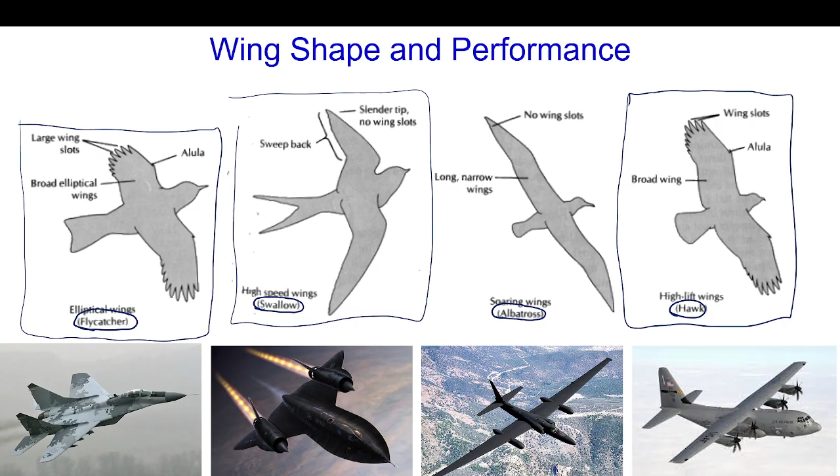So the original purpose of the C-130 was to deliver heavy artillery essentially across the ocean to what was the Korean War battlefield. And while it needed to do multiple jumps for refueling, it was nonetheless designed and specified to carry very, very heavy loads up to 75, even 100,000 pounds of munitions, such as that tank shown there.

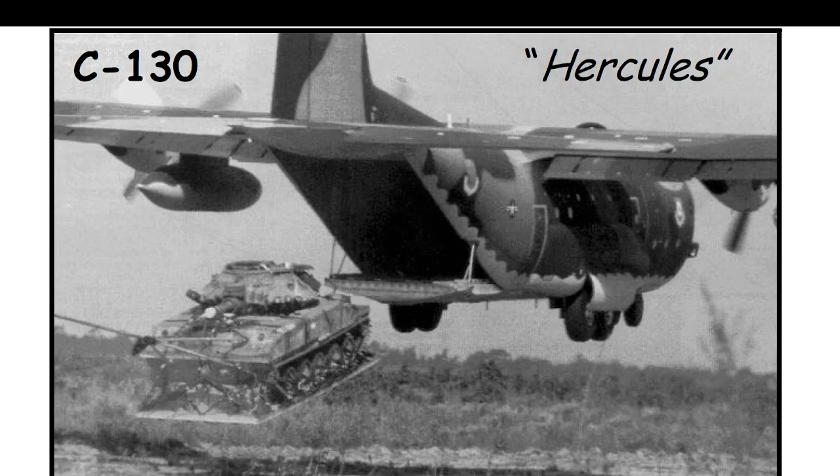So the assignment for students in my ME 4730 class are parts 2 and 3 of what I've listed here. Today we're going to go through part 1, which was a final lesson in my ME 3300 fluid mechanics class, and this is serving as a review and a lead-in to ME 4730 thermal fluid systems design.

So today we're going to size the engines to allow a C-130 to carry 75,000 pound force of load over 1,500 miles at a velocity, a constant cruising speed of 350 miles an hour.

And the next parts, part 2 and part 3, are to size the engines required for the aircraft to actually take off at an even heavier load with a relatively short runway of 3,750 feet. And then with the information on the power of the engines required to perform that takeoff, we're going to actually design the engines while we're studying the Brayton cycle in thermal fluid systems design.

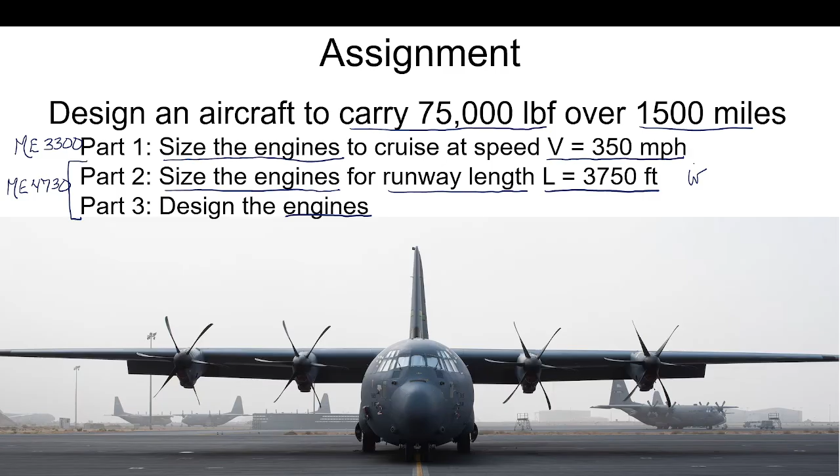So let's start off with a little review. All the information on the C-130 used here is all publicly available.

This data is a screenshot of information at the military website, giving the overall dimensions: a wingspan of almost 133 feet, a length of almost 100 feet, a height of almost 40 feet, and then what we have here is the wing area or planform area, which we'll be using to calculate wing lift and wing drag.

Then we have other information such as the empty weight of 75,800 pounds. This is just the airframe without any additional load. And then we can add in a useful load of around 72,000 pounds.

Now, it can actually go up to nearly 100,000 pounds under wartime conditions, but for present purposes we're going to focus just on a 150,000 pound aircraft for the majority of the calculations done here.

Now we have further information on the power plant. It's got 4 Allison T56 turboprop engines. These have actually been replaced by Rolls-Royce — Allison was bought out by Rolls-Royce, so they've rebranded the engines. Still a T56, but you can see the 4 engines listed in this frontal view right here.

We actually already have the information or the answer to the calculations we'll be conducting today, but we need to see the intermediate steps and why it is we end up with these values. The propeller diameter, you can see here as well, is 13.5 feet diameter. Very large propellers, a rather imposing aircraft, and we want to understand its performance characteristics.

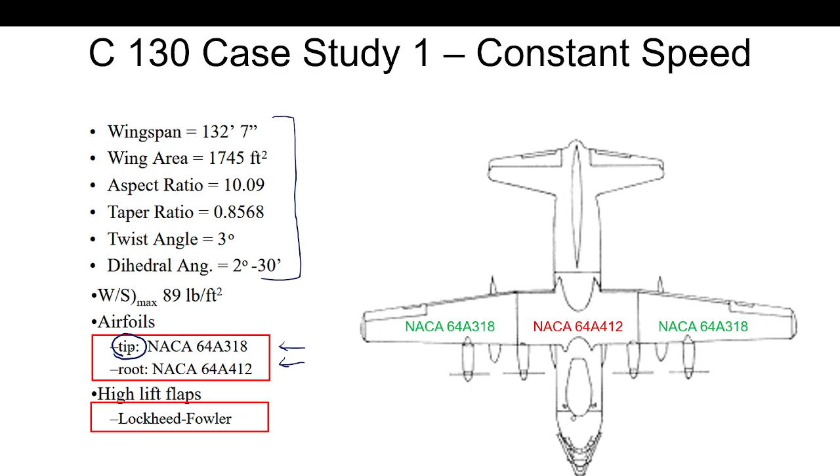Further excerpts from online information show not only the dimensions we've looked at already, but also what type of airfoils are being used. These are 2 types of NACA airfoils. One type is used on the tips — that's this area right here, what we'll refer to as the wing tips. This is a blended NACA airfoil going from a large chord length to a relatively short length. Then at the root, where the wing attaches to the fuselage, we've got this NACA airfoil with a constant chord length.

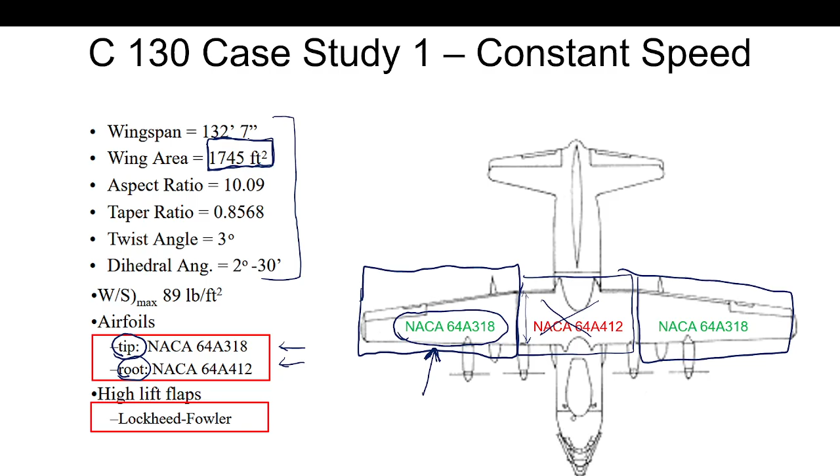Chord length is this dimension right here, attaching it to the fuselage. Now, because the majority of the aircraft is comprised of this NACA 64A318 airfoil, we're going to just assume that it gives the lift and drag characteristics of the entire wing, and we'll disregard the rest for present purposes while maintaining the same planform area, A sub P, for the entire aircraft. Now we can look up the NACA airfoil lift and drag coefficients from this handy website, Bigfoil, right here.

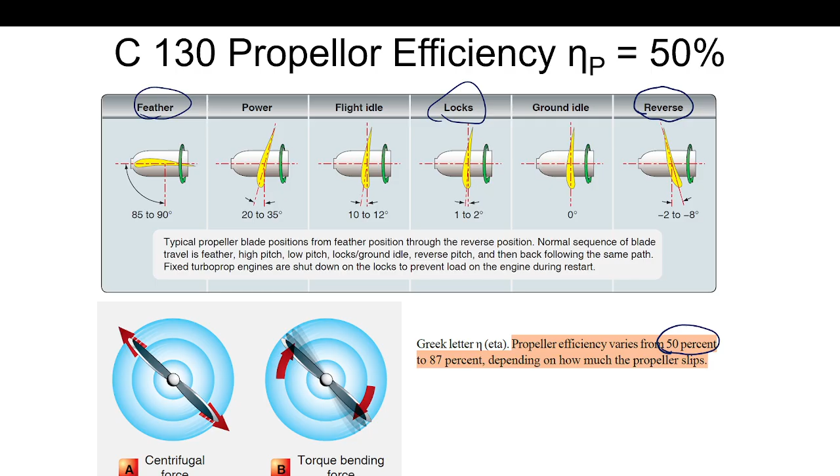Now, another thing we want to consider is there's a multitude of efficiencies and tables of data that we need to make use of. These aircraft have variable pitch propeller blades, which can go everything from fully feathered to locked, a shift of angle of upwards of 90 degrees. They can even go past 0 degrees and provide some reverse thrust if it needs to back up on the runway. Now, these variable pitch blades end up having variable efficiency in their ability to convert shaft power to fluid power, and we're going to take the conservative estimate of 50% for all instances, just to ensure our engine is over-designed for the performance requirements.

So this is the case study that I give to my fluid mechanics students, junior level mechanical engineers, as we work on the aerodynamic chapters of the fluid mechanics textbook. So here we'll be reviewing this.

We're given a fully loaded C-130, uses NACA 64 A318 airfoils, and flies in calm air. That is to say, the wind velocity in the region is 0 miles per hour or feet per second, and it flies at a constant altitude for 1,500 miles. We chose the altitude of 20,000 feet, and the aircraft has the following dimensions and performance requirements. We also want to make an assumption that the momentum flux correction factor is 1 in this case.

We'll be looking at a variant of Newton's second law, referred to as the conservation of linear momentum equation, which is used to calculate the thrust of this aircraft. Typically for turbulent flow, it can be something of the order of 1.05, but for our purposes we're just going to set it at 1.

Now, we already saw that the empty weight of the aircraft is 75,800 pounds. A nominal loaded airplane is around 150,000 pounds, which can actually go up to 175,000 in wartime conditions. We saw a blade diameter of 13 feet 6 inches, 13 and a half feet.

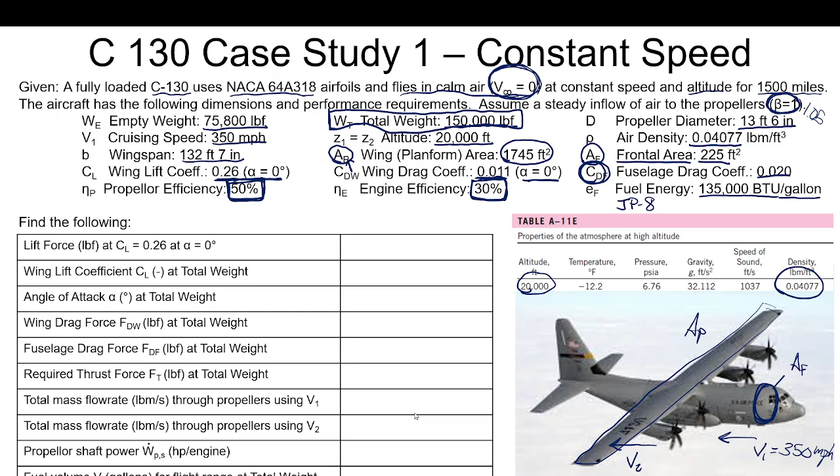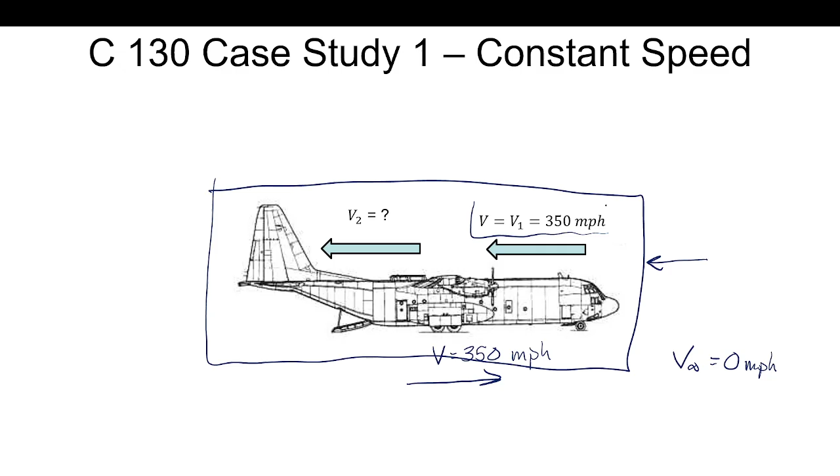So let's start off with just the airspeed of the aircraft itself. We know that it's flying at 350 miles an hour to the right, and the ambient air is 0 miles an hour, that is to say, it's a calm day with no wind. So what happens in this case is that the aircraft induces a wind velocity on itself. Despite the solid object moving 350 miles per hour to the right, if we put our control volume around the aircraft, we can say air is entering the control volume to the left, from the right to the left, at 350 miles per hour. So this is our aircraft speed.

And then we're still looking, we have to do some calculations to find our velocity of the air exiting the propellers right here, the V2, but we'll get to those equations soon enough.

Let's take a look at the forces acting on the aircraft. On one hand, we have the force of lift holding it in the air. It's the product of the lift coefficient times the dynamic pressure, 1/2 rho v squared, times the planform area, the area of the wings as viewed from above.

That counteracts the weight of the aircraft. If the aircraft is not accelerating upward or downward, its acceleration is 0, and the force of lift is equal to the weight, either of the empty aircraft or the total weight of the loaded aircraft. So this would be the summation of forces in the y direction.

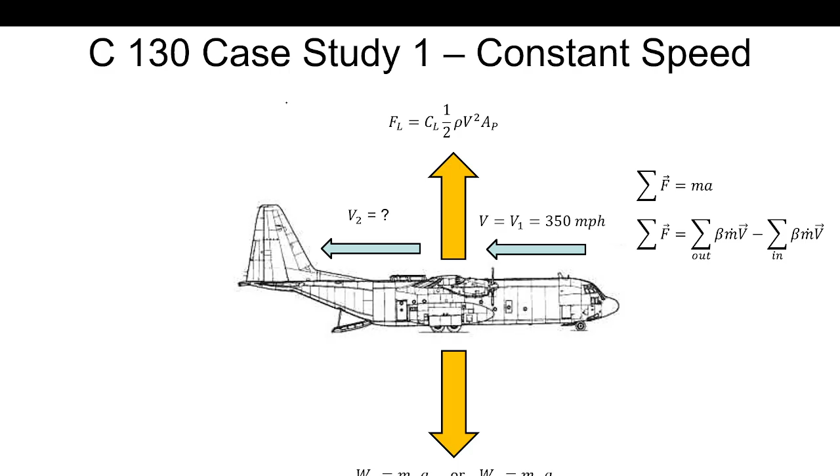We also want to look at the summation of forces in the x direction. To do that, we take a variant of Newton's second law, referred to as the conservation of linear momentum equation for steady state operation, and simplify it to give us the force of thrust as the product of mass flow rate through all four propellers times the change in velocity from the downstream velocity, V2, to the upstream velocity, V1.

In order to maintain constant velocity with no acceleration forward or backward, we'll say A is equal to 0. Then we know the force of thrust has to counteract the force of drag acting on the wing—the product of drag coefficient of the wing, dynamic pressure, and planform area of the wing—as well as the drag force acting on the fuselage, the product of drag coefficient of the fuselage, dynamic pressure, and frontal area of the fuselage.

So let's jump into it. We'll start with the summation of forces in the y direction, which is equal to 0. All we have to do is say the force of lift counteracts the force of weight. So we rewrite this as summation of forces equals force of lift acting upward minus the weight, starting with the empty aircraft, equal to 0. Therefore, force of lift is equal to weight of the empty aircraft for the first step of this problem.

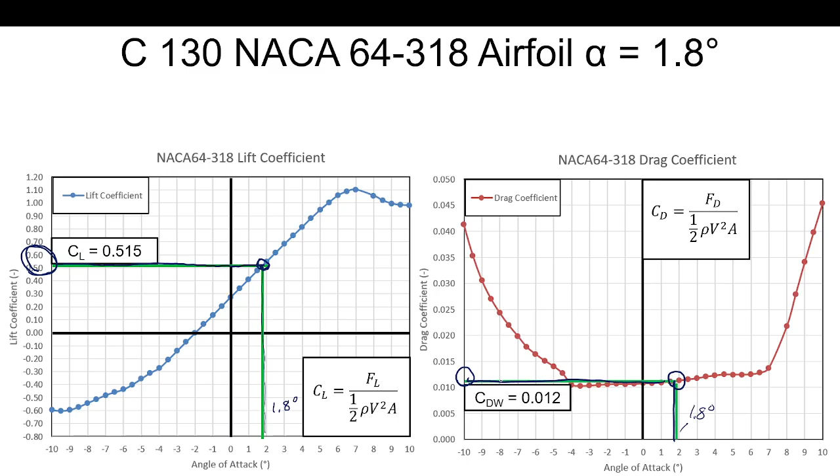So we just worked through the first three calculations. We found that for the unloaded aircraft at 75,800 pounds, that is at an angle of attack of 0 degrees for the wing, using the lift and drag coefficient shown there, we calculate that it would produce 75,678 pound force of upward lift force on the aircraft, thus holding it in the air.

We could say the difference between 800 and 678 is negligible, about 1% variation between the two values. So we can confirm our answer. This was intended as an illustration to allow you to check the results.

Now, our second set of calculations was actually done using the total weight of the aircraft. We found that the airfoils themselves have to be pitched up. Rather than an angle of attack of 0, they have to be pitched up to an angle of attack of 1.8 degrees, obviously exaggerated in that illustration. But nonetheless, this tells us what tilt the aircraft has to be adjusted to in order to ensure level flight.

Now let's proceed on to the wing drag force at total weight. This calculation makes use of the drag coefficient, the wing drag coefficient that we saw previously, the one we extracted from the table, taken from the 1.8 degree angle of attack.

Likewise, we need the wing drag force, the fuselage drag force - that actually doesn't change. And we saw, of course, the wing lift coefficient at that angle of attack as well. But we will be making use of the fuselage drag coefficient, which was 0.020, and then this drag coefficient is the 0.012 that we have for the fully loaded aircraft.

Present calculations in this presentation are going to be based on the fully loaded aircraft now. This, again, was our 513.3 feet per second. And now we're going to figure out the force of drag on the wing, force of drag on the fuselage, and then the thrust force required to maintain steady velocity - that is, acceleration equal to 0 feet per second squared on this aircraft.

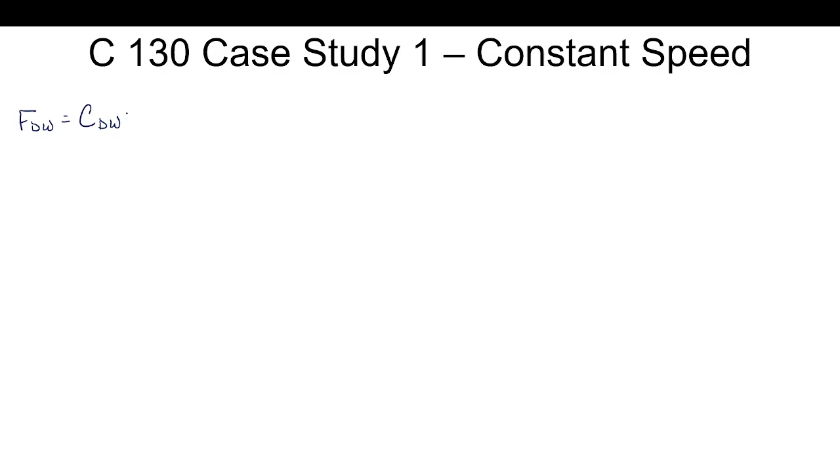So let's start off with just our force of drag on the wing. Force of drag on the wing is equal to our drag coefficient of the wing, which we read from the tables, times our 1/2 density velocity squared planform area.

0.012 times 1/2 times 0.04077 pound mass per cubic foot times 513.3 feet per second quantity squared times planform area of 1745.

Feet squared. So this gives us a force of drag acting on the wing of 112,468, and we roll our units through. We've got pound mass feet per second squared, which we again have to convert to pound force.

This is a step that trips up many people: the calculation of force from mass times the acceleration. In this case, the units we get are pound mass feet per second squared. So this then gives us a drag force on the wing of 3,493 pound force.

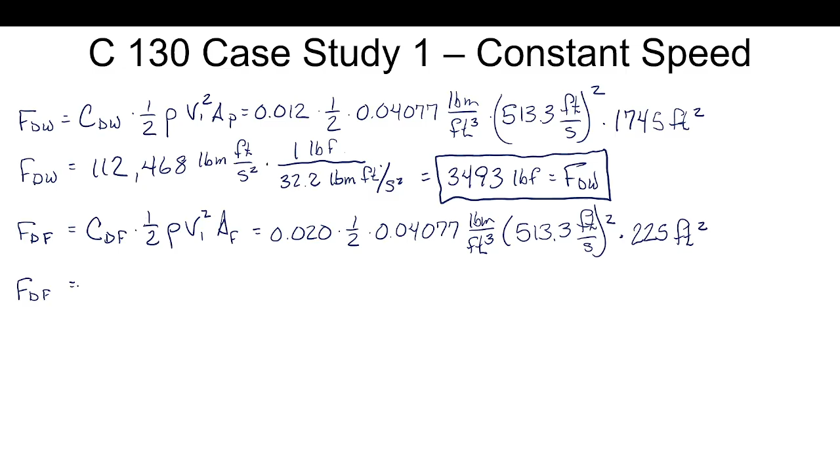Both of these forces, force of drag on the wing and force of drag on the fuselage, are horizontal forces. Our force of drag on the fuselage is then 24,169.4 pound mass feet per second squared.

And again, we have to do our unity conversion ratio of 1 pound force for every 32.2 pound mass feet per second squared, converting our mass acceleration into units of force in the U.S. customary system. This gives us 750.6 pound force as the force of drag on the fuselage. Put a box around it, it's another answer that we were looking for.

With these then, we can take our summation of forces in the x direction is equal to mass times acceleration, so that's Newton's second law there. We know if the aircraft is holding a steady velocity, then its acceleration is 0, and so we can say our force of thrust in the horizontal direction minus our force of drag on the wing minus our force of drag on the fuselage is equal to 0. Therefore, force of thrust is equal to force of drag on the wing plus force of drag on the fuselage.

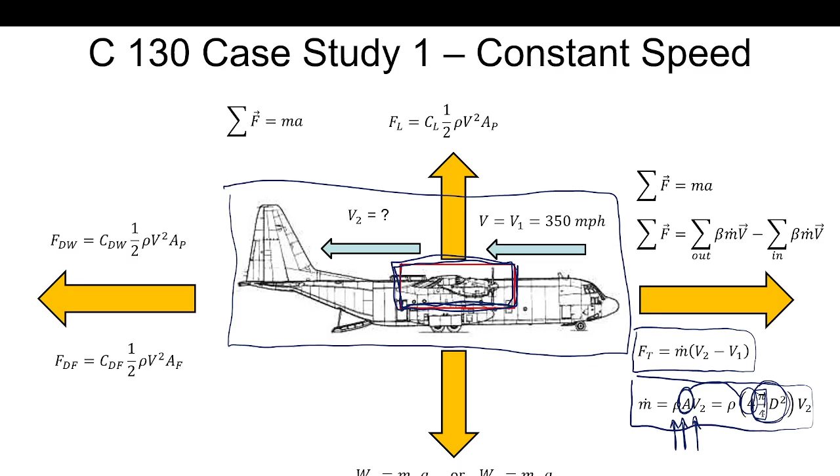Previously, our control volume was the entire aircraft, and now we're zooming our control volume into the engines themselves, taking them into account all at once, using the force of thrust equation and the mass flow rate equal to density of the air, total area of the propellers, times velocity of the airstream. This total area for 4 propellers is 4 times the standard area of a circle in terms of diameter, pi-fourths times diameter squared.

So first we need to calculate mass flow rate of the air using V1 with the information we already have: the density of air, the area of the propeller blades, and the velocity of the incoming air. But this method is incorrect. We're going to take the second, longer approach after we work through that and find out what V2 is, then calculate mass flow rate using V2. But let's start with the easy approach.

Mass flow rate, we'll call it m dot sub 1, is equal to density times area times V1. We use our density of air of 0.04077 pound mass per foot cubed, times our area. We've got 4 propellers, and the area of each propeller is pi-fourths times diameter, so 13.5 feet, this quantity squared, times our velocity of 513.3 feet per second. The product gives us 11,982 pound mass per second, equal to m dot 1.

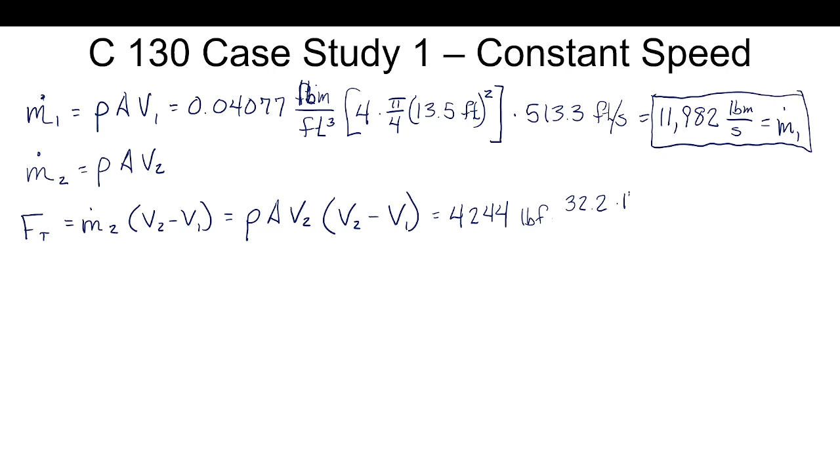Knowing that our force of thrust is equal to mass flow rate, m dot 2, times this difference in velocity from downstream velocity V2 to upstream velocity V1, we can equate that to the force of thrust, 4,244 pound force. But again, we need to convert our pound force to mass times acceleration using the unity conversion ratio of 32.2 pound mass feet per second squared for every 1 pound force. This returns us to the 136,657 pound mass feet per second squared that we saw earlier.

Now we can take this equation and rearrange it. We take these values and say density times area times V2 squared minus V1 V2 is equal to force of thrust. And if we divide both sides by density times area, we get V2 squared minus V1 V2 minus force of thrust divided by density times total area of all 4 propellers, the swept area of the propellers, equal to 0.

Some of you may recognize that this is an equation in the form ax squared plus bx plus c equals 0. I know some of you have the quadratic equation memorized, where we solve for our unknown x, which corresponds to V2. We solve this using the quadratic equation: negative b plus or minus the square root of b squared minus 4 times a times c, all over 2a. This allows us to solve for x using this equation, and we apply that to our equation where a is equal to 1, b is equal to negative V1, and c is equal to that expression right there.

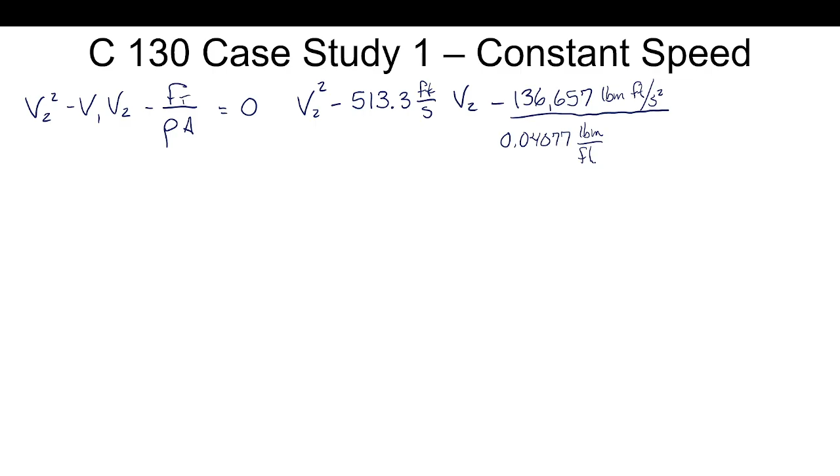We can then say V2 squared minus, plugging in the actual value for V1, 513.3 times V2, feet per second times V2, minus 136,657 pound mass feet per second squared divided by 0.04077 pound mass per cubic foot, times our 4 propellers with each having a swept area of pi fourths times 13.5 feet, in this case quantity squared.

This then allows us to compact it down to V2 squared minus 513.3 feet per second times V2 minus 5,854.3 feet squared per second squared is equal to 0.

As we saw, that is of the form A V2 squared plus B V2 plus C equals 0, a standard reference back to that square polynomial we saw earlier.

Now I do have to point out, we saw the conversion of pound force to pound mass right here. If we work through these calculations, pound mass cancels pound mass. Feet cubed in the denominator jumps to the numerator, and the denominator of the denominator jumps to the numerator, creating feet to the fourth, which is then canceled, 2 of which are canceled by these feet squared here. So this gives us units of feet squared per second squared.

In this case, V2 is equal to 524.5 feet per second. This is kind of an intermediate calculation, but as I said, you need to use V2, the downstream velocity, to ensure you account for the energized flow.

So continuing on, we'll calculate our m dot 2. So m dot 2 is equal to density times area times velocity 2, which is equal to 0.04077 pound mass per cubic foot, times 4 propellers, each with a swept area of pi fourths times 13.5 feet diameter squared, times our velocity 2 that we just calculated of 524.5 feet per second. This gives us a mass flow rate using V2 of 12,244 pound mass per second equal to m dot 2.

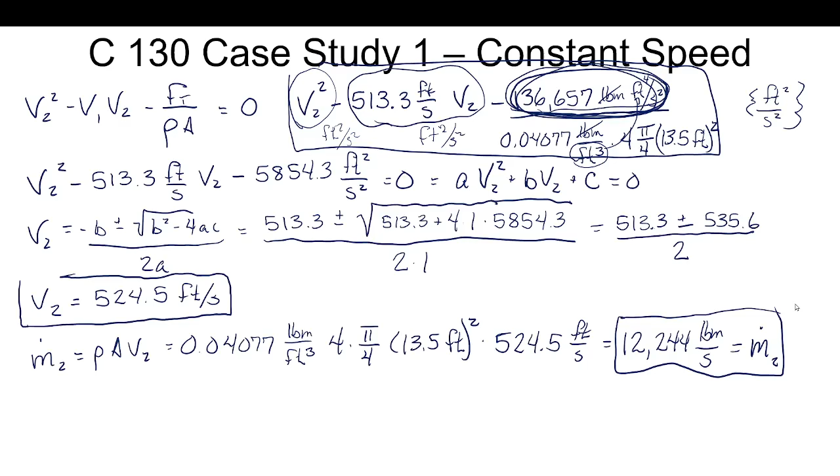So working through those calculations, we saw a mass flow rate using V1 gives us nearly 12,000 pound mass per second through all 4 propellers. Using the V2 that we calculated from the quadratic equation, we get the slightly higher value of 12,244 pound mass per second. This is the value that we have to use, and V2 is the approach that we have to take for the final steps of our calculations.

Now let's look closer at the engine again. We're considering all 4 engines collectively as a control volume, and we'll just say we're looking at a cross-section of 1. So we saw the aircraft traveling at 350 miles per hour induces this velocity of 350 miles per hour, or for our purposes, 513.3 feet per second, as our V1, the velocity of the aircraft, which we use to calculate lift and drag forces. Then using the conservation of linear momentum equation, we found that the downstream velocity based on the calculated thrust has to be something of the order of 524.5 feet per second.

Now we have a known velocity 2, we already knew velocity 1, and we also calculated mass flow rate using velocity 2. From this we could check and confirm that our thrust calculations are correct.

So this then would be used to calculate our thrust. We can use the thrust equation: force of thrust is equal to m dot 2 times V2 minus V1, which is equal to

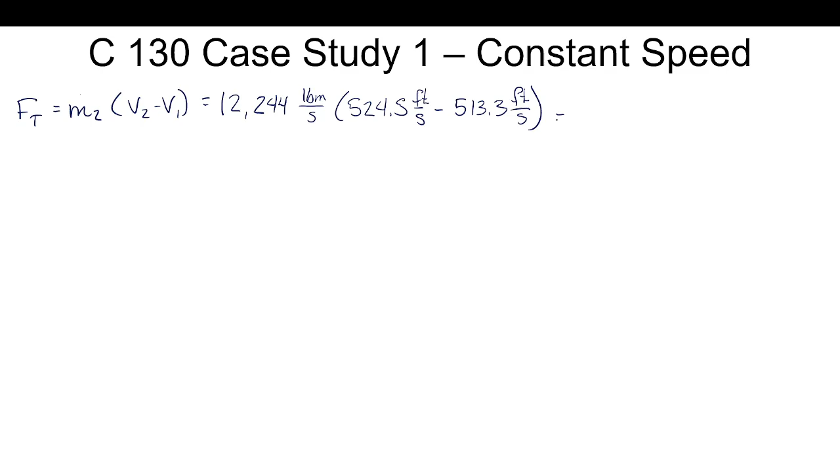12,244 pound mass per second, times 524.5 feet per second minus 513.3 feet per second, which is equal to 137,133 pound mass feet per second squared.

As we've seen multiple times already, we can't just use force with those units. We've got to take our force of thrust is equal to 137,133 pound mass feet per second squared times 1 pound force, which has 32.2 pound mass feet per second squared of mass times acceleration. This gives us 4,259 pound force as our force of thrust using V2 for both velocity and mass flow rate.

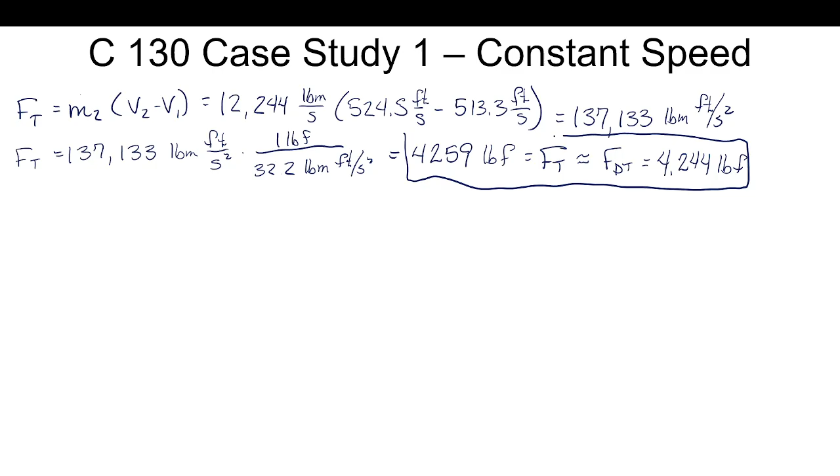That's approximately equal to the total force of drag, sub T, which we saw earlier was 4,244 pound force. So this is just kind of a check. Again, these agree within 15 pound force, which is well within the margin of error for these calculations.

Now let's move on to sizing the engines, kind of the culmination of this set of calculations. In this case, we need to make use of the power form of the general energy equation for a fluid operating at steady state. We've got a horizontal flight direction, so our Z1 going into the engine is equal to Z2 coming out of the engine.

Our pressure is atmospheric at that altitude, so P1 is equal to P2, given the size of our control volume. And as we saw, V1 is a little bit less than V2 right here, but these are the assumptions that we're going to be using in this calculation.

What I can say as well is that even though many jet engines are regarded as jet turbines, that's only accurate when we consider the control volume within the jet engine itself. For present purposes, the control volume we're looking at means it's effectively acting as a pump. It's taking in air from up front right here, energizing it, and increasing the energy, increasing the power of that air.

So we're looking for pumping power of the 4 engines, which will then subdivide into individual engines, and it's not actually a turbine, so we're going to say no turbine is present, and we're going to disregard mechanical losses as well.

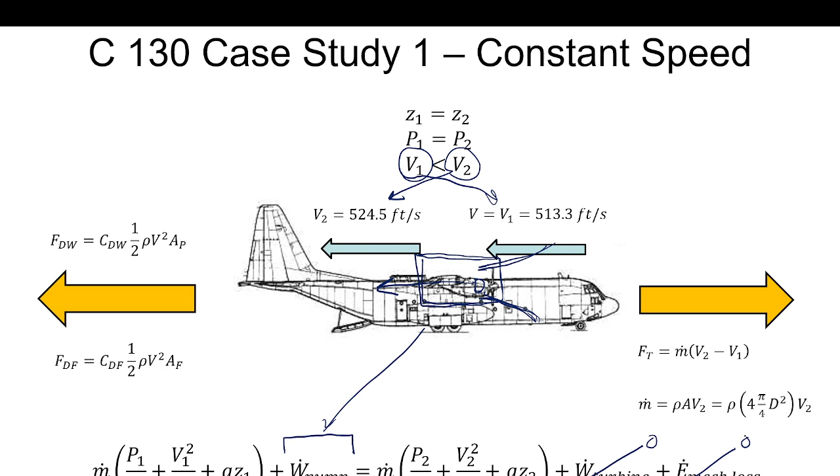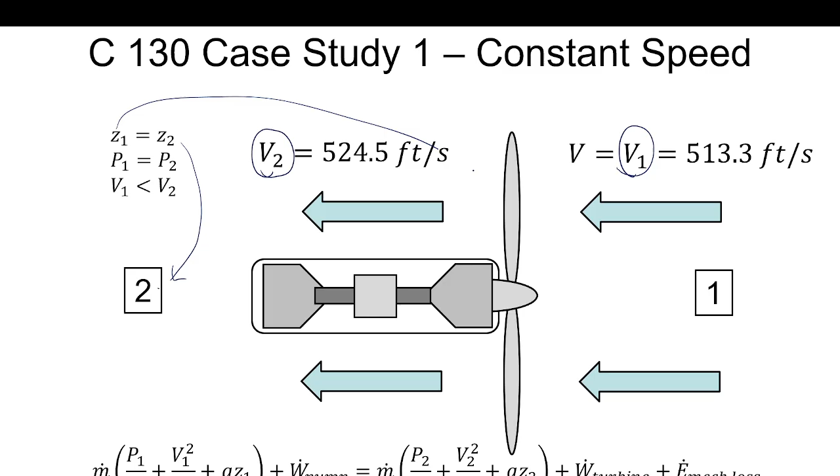So again, kind of what I had mentioned earlier, we've got our point 1, our upstream with its associated velocity V1, our point 2 downstream with its associated velocity V2. The point Z2 would be right around here, point Z1 would be up there, P2 right there, P1 right there, so on and so forth.

And we're going to take this power form of the general energy equation and move it forward. By the way, our control volume is still being placed around the engine with sufficient boundary distance to avoid any of the complications associated with turbulence.

Later in the semester, at least in thermal fluid systems design, we're going to draw our control volume around the jet engine itself, which is comprised of a compressor, a burner, and a turbine. In this case, it would be accurate to call it a turbine, but for present purposes, we're calling this a pump. So power of the pump.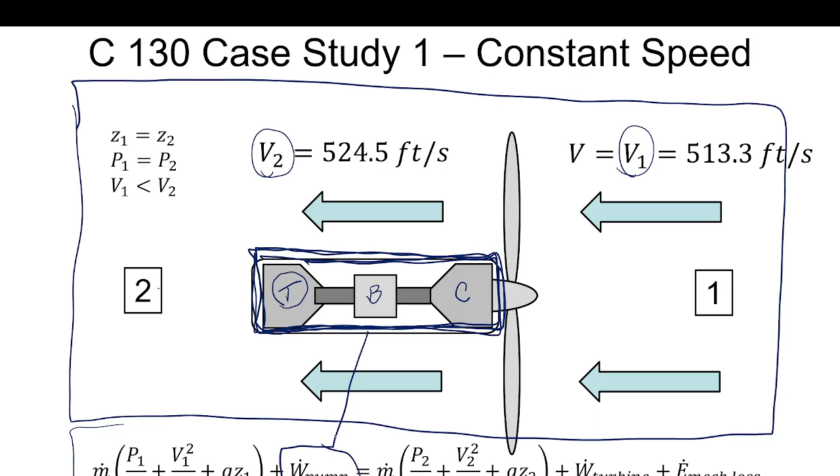So going forward, we now need to make use of this general energy equation. We saw there is no turbine present, so we're going to say the power of the turbine is 0. We're going to disregard mechanical losses.

We're going to say Z1 is equal to Z2, so these two terms just cancel out. I'm just going to zero those out there. P1 is atmospheric pressure at that high altitude, and P2 is atmospheric pressure. So these cancel out as well.

And this then allows us to rearrange the equation to calculate power of the pump. In this case, all 4 jet engines or turboprop engines are equal to m dot 2 times V2 squared minus V1 squared over 2.

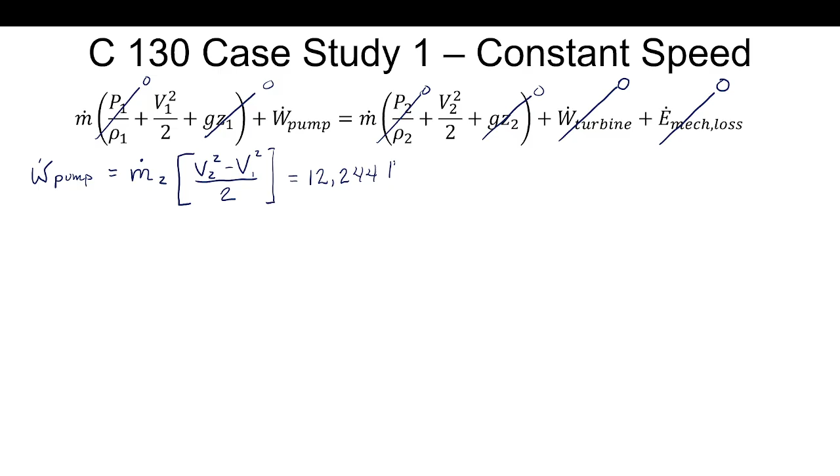And now if we plug in our values using our mass flow rate from V2, 12,244 pound mass per second, times 524.5 feet per second, quantity squared, minus 513.3 feet per second, quantity squared, divided by 2, we get our pumping power, that is to say the power of all 4 engines, is equal to 71,158,210 pound mass feet squared per second cubed.

And we need to undo this with the unity conversion ratio again. So we'll do our 1 pound force divided by 32.2 pound mass feet per second squared. And so this gives us a magnitude of 2,209,882 pound force feet per second.

Now that is a somewhat common unit of power, but it's not the unit that was requested in the actual problem statement. We want units of horsepower. So let's carry this through another conversion. Power of the pump is equal to 2,209,882 pound force feet per second times 1 horsepower, which has 550 pound force feet per second in it. And so this gives us a value of 4,018 horsepower. Now that's the fluid power that the engines have to provide to allow the aircraft to maintain that thrust and velocity that we saw earlier.

Now that's kind of an intermediate step. We're going to say W dot P comma E is 1,004.5, but now we need to take into consideration the efficiency of the propellers themselves. So just to kind of review a little bit, we've got our turbojet engine, we've got a shaft right here, and then we've got a propeller right here.

We figured out that the power added to the air, W sub PE, for each engine is 1,004.5 horsepower. But if this propeller is 50% efficient, eta propeller is equal to 50% or 0.5, then we need to make that correction to figure out the shaft power of the propeller. So we'll take our shaft power, W sub P comma S on an individual basis, is our fluid power, WP comma E, divided by the efficiency of the propeller. Notice this is the English letter N, just for the number of engines. This is the Greek letter eta for the efficiency of the propeller. Be wary of conflating the two.

So here then we've got 1,004.5 horsepower divided by 0.5, our 50% efficiency of the propeller blades. This gives us 2,009 horsepower, in this case shaft horsepower per engine. And this is typically how a lot of engines are rated in terms of shaft horsepower rather than fluid power of the engine. So this then is our 2,009 horsepower per engine.

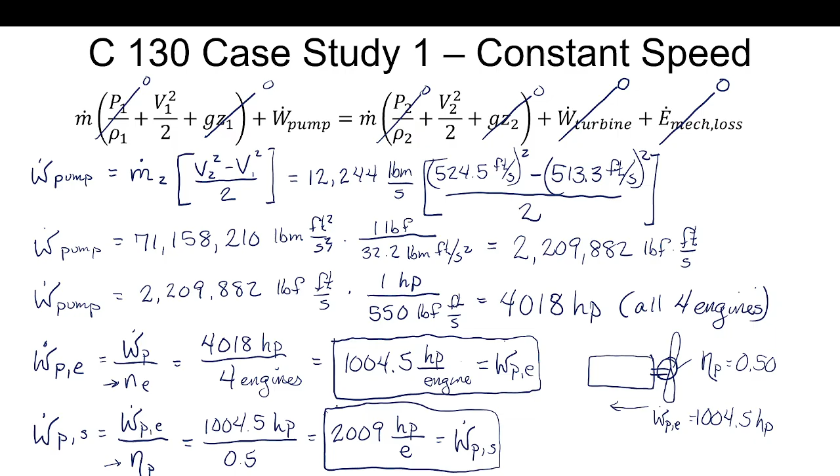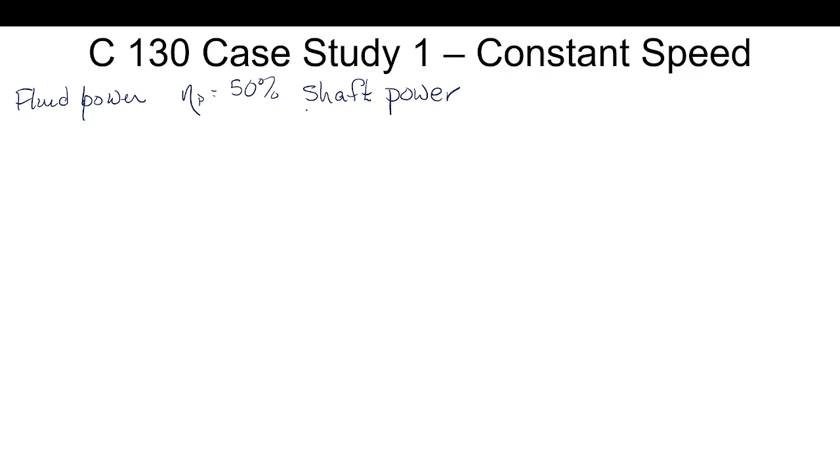Now we need to figure out the fuel power, a form of chemical power required for each engine to give it the range that it actually attains. So we saw fluid power, and the efficiency of the propeller was 50%. It takes shaft power from the engine and converts it to fluid power at 50% efficiency. We just calculated the shaft power per engine was 2,009 horsepower per engine. The fluid power was 1,004.5 horsepower per engine.

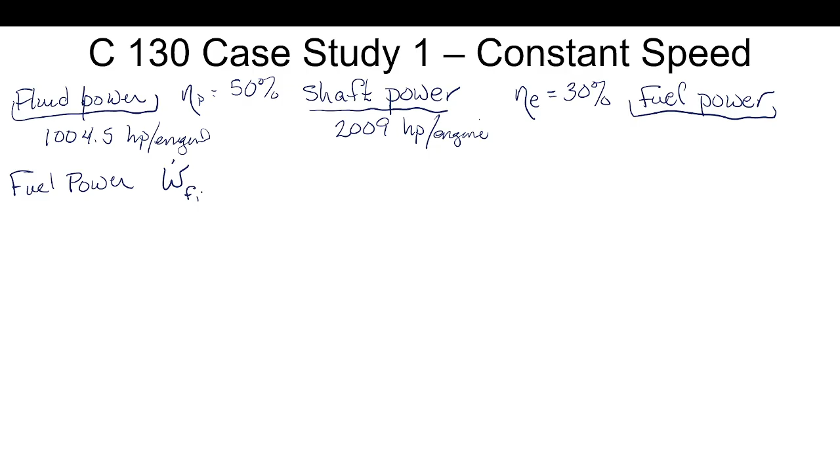Now we need to figure out how engine efficiency, in this case 30% efficiency, accounts for the fuel power. This is, of course, the JP4 fuel that we were interested in, and we need to figure out how that accounts for, or how much of that fuel power is coming in under those conditions. So fuel power, we're going to say fuel W dot, fuel per engine is equal to the shaft power of the engine divided by the efficiency of the engine. That is to say the Brayton efficiency of the engine, which is about 0.3. So this then gives us 2,009 horsepower per engine divided by 30% efficiency gives us 6,697 horsepower per engine in the way of fuel.

We're on to the very last calculation, is how many gallons of fuel are needed to carry the aircraft 1,500 miles at 350 miles per hour. So now we can say total fuel power. So I'm just going to do W dot F comma T rather than on an engine basis, on a total power basis, is equal to 4 times our power of 6,697 horsepower per engine. And so this tells us the total chemical power, or the total fuel power of the aircraft, is 26,788 horsepower.

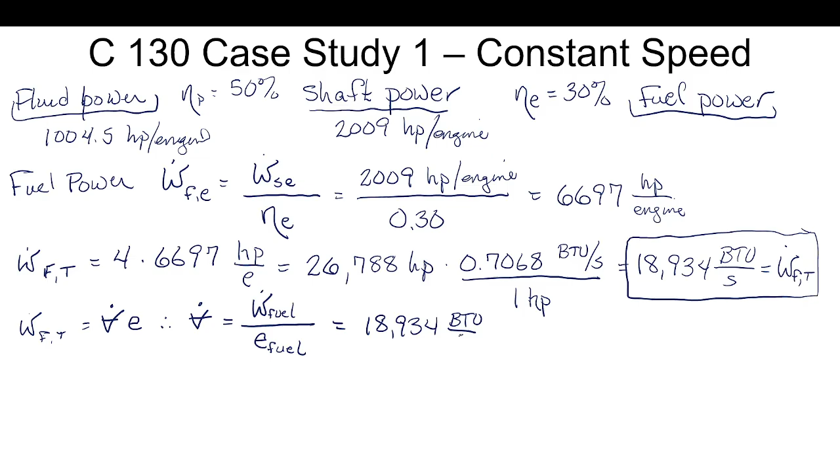So this gives us 18,934 BTUs per second divided by 135,000 BTU per gallon. This tells us we've got a volume flow rate of 0.1403 gallons per second.

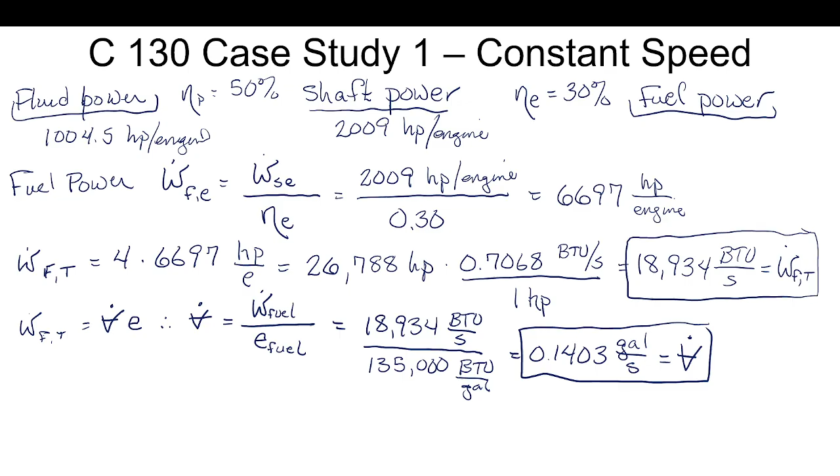So another major intermediate step. Now we just need to figure out how many seconds it takes for this aircraft to fly this distance of 1,500 miles. A very basic calculation: distance equals velocity times time. We'll write that as DIST, because I don't want to conflate that with diameter of the propellers, equals V1 times time.

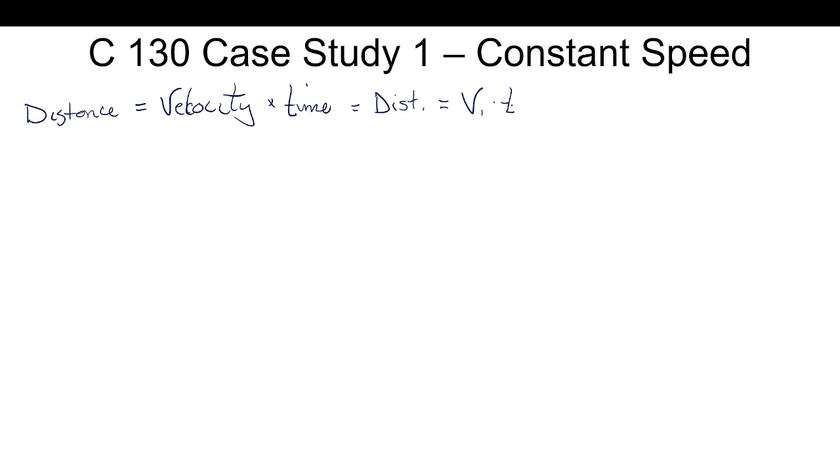From this we can say time equals distance divided by velocity, which is 1,500 miles in our very original problem statement, divided by 350 miles per hour. This tells us it takes about 4.286 hours to go that distance.

And then we can multiply that by 3,600 seconds for every hour and find that it takes 15,429 seconds of time to travel 1,500 miles at 350 miles an hour.

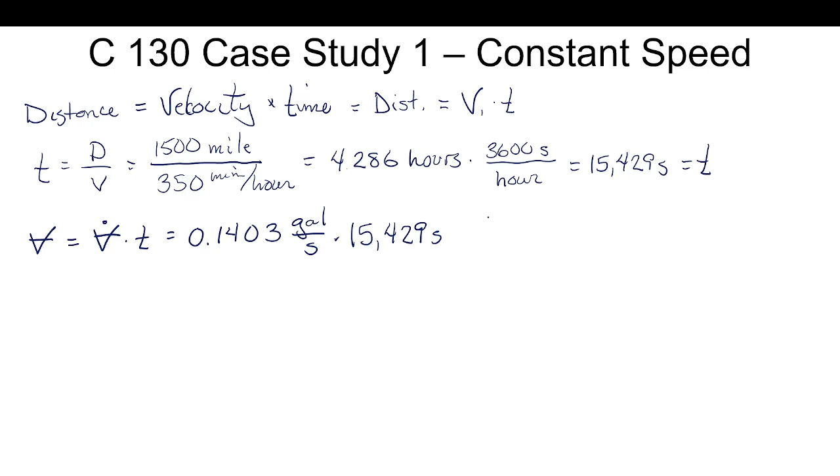Now, to calculate the volume of fuel required, we take the product of volume flow rate and time. This tells us we've got a volume flow rate of 0.1403 gallons per second times 15,429 seconds, which tells us it takes 2,163.9 gallons. This is our total volume flow rate of fuel, the total fuel needed to go that distance, our final answer for these calculations.

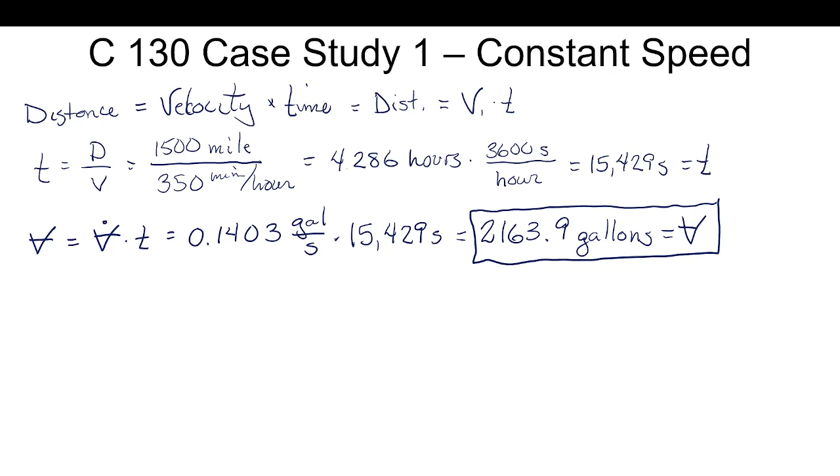So we went through the calculations at the very start. We looked at a situation where we have an unloaded aircraft with its nominal lift coefficient at 0-degree angle of attack, which provides a lift of around 75,700 pound force, pretty close to the nominal value of the empty aircraft.

Then we saw that when it was loaded up to 150,000 pounds gross mass or total weight, it requires a lift coefficient of 0.515 to stay in the air, and it has to fly at an angle of attack of 1.8 degrees. This gives rise to the drag coefficients and lift coefficients we saw in the airfoil tables, and we found that the drag force is around 3,500 pound force. The drag force on the fuselage is around 750 pound force, and the thrust required to maintain velocity is the sum of this plus this, that is to say 4,244 pound force.

Then we saw that we cannot take the easy approach of using V1 to calculate mass flow rate. Rather, we have to use the thrust equation and turn that into a quadratic equation to solve for V2, and thereby attain a mass flow rate of 12,244 pound mass per second.

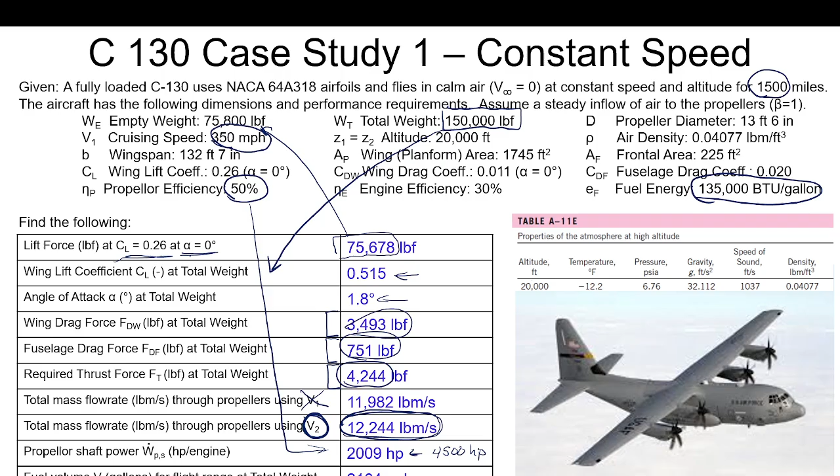Now, earlier you saw that the engines were rated around 4,500 horsepower, and you might ask why they oversized those by a factor of 2. Well, these types of aircraft also have to be able to take off with that fuel load and accelerate under relatively short runways, which is the topic of the subsequent portions of this case study.